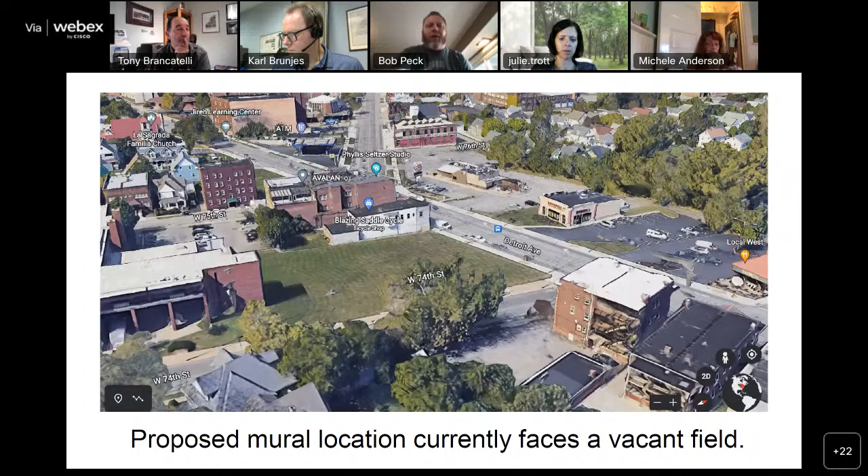I noticed they had a garage space that had a blank kind of gray wall on the side there that you can see located in this image. The wall itself faces a vacant field currently where the original Watterson-Lake School used to stand. And right now it's open to the side street as well as Detroit Avenue. So being an artist, I thought it would look good with a little bit of color on it and a nice mural. So if you go to the next slide, please.

This is a detail shot of the wall. It's 24 feet wide, 9 feet tall. As I mentioned, it's just sort of a blank gray wall right now. It does have a fence in front of it with about 3 to 4 feet of clearance between the fence and the wall. So there is space to get in there and create a mural. Next slide.

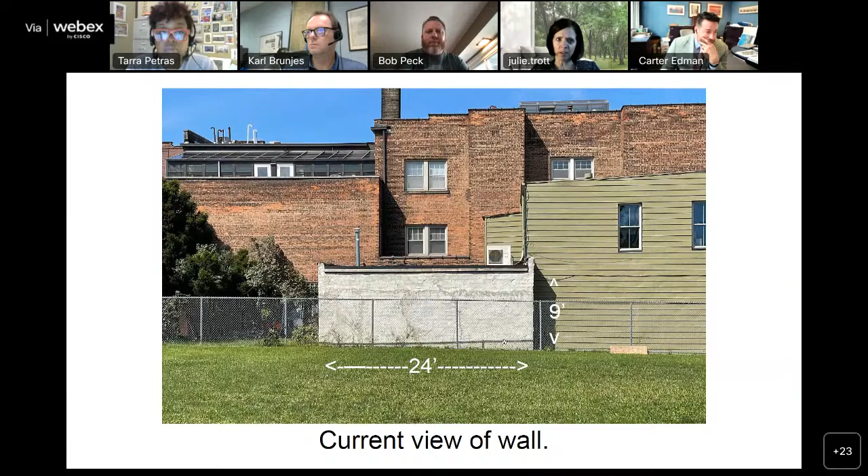Mr. Strickland. Thank you, Madam Chair. I'd just like to express that I'm also very much in support of this mural, and comment that oftentimes we like the mural perimeter to be withheld to expose some of the structure as a frame around the mural. But in this case, I agree with the comments from the Design Review Committee that it's most appropriate to cover the entire expanse of the wall. I think it looks great.

Thank you, Mr. Strickland. I'm also in support of the mural. I think this is a very interesting location.

I only have one question - is there redevelopment planned? If redevelopment happens on the adjacent property, what is the maintenance approach for this mural? You said there is 3 feet of clearance to allow maintenance of the mural moving forward?

Yes, I don't know where the property line officially begins for the lot itself after the fence. However, if the fence does belong to the Blazing Saddle property along that fence line, there should always be space to get in and maintain the mural as needed. I am aware that eventually that site could have large construction there. I just figured for the time being, whether it's a few months or hopefully even a few years, it'd be nice to brighten up that space with some art.

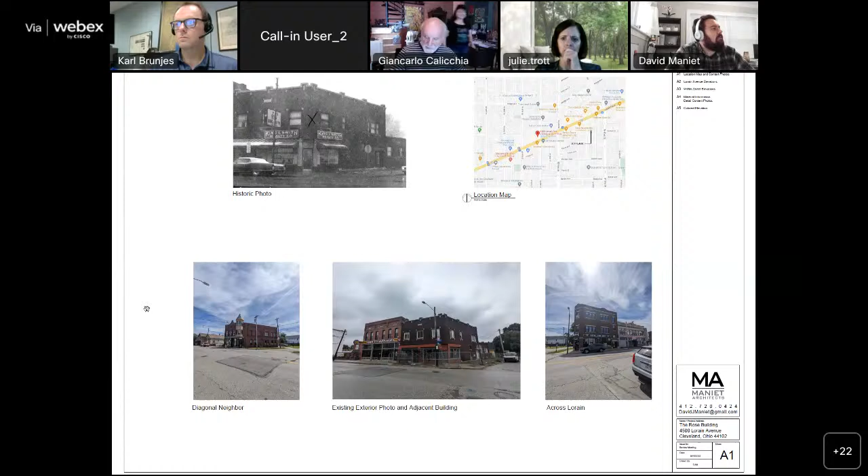Yeah, a couple other views of the building, one a little bit farther back. Thank you, Google Street View, for that, where it was a white version instead of the orangey reddish version of the storefront. We're looking to take it back a little bit farther to what would be a little more traditional.

So implementing full glazing, transom type windows above, and then restoring a brick detail base with some sandstone, matching the sandstone detail that is there existing. So what we see in the photo is how we want to restore the upper half, almost exactly.

Other than the windows, we have these white vinyl sliders, which also felt out of place. Normally we see a traditional double hung look, so we want to bring that back in pairs as it felt appropriate for the proportions.

And then taking some note from our discussion last week with the Ohio City Board. Across the street is the Arsenal Cider House. There's some nice detail there that was also pretty similar to our building. Some of the heights were a little bit different, but in the discussion, as a way to get some resolution on how the brick detailing could work.

On their side, they have a little bit of a higher sandstone base that matched that sill line. They kind of framed out and created a nice little bit of a detail that we wanted to recreate. We felt it would be appropriate based on what we're seeing above, where we have a couple of coursing details that block in.

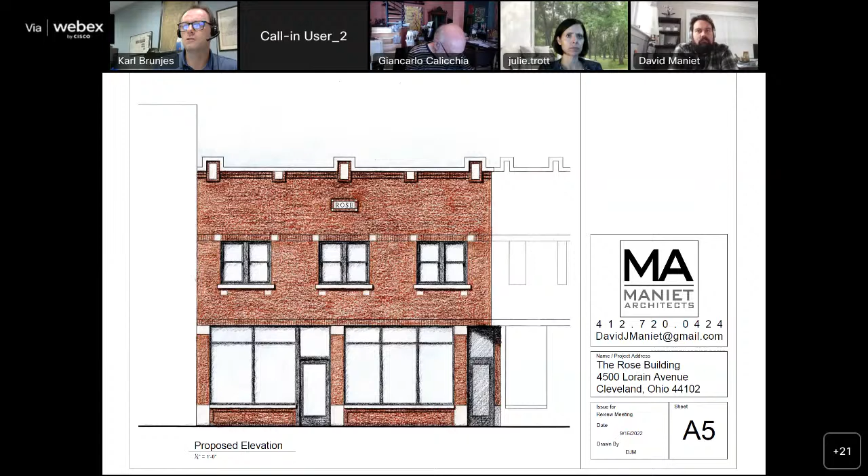Karl: Madam Chair, I do not see our representative, and they did not send over notes. I know this was approved, and they were thankful for the job being done, and it looks like they did make the changes requested. The windows were different when I remember it, and they did make the changes. So this does reflect what the design review committee had recommended. I just don't have those notes in front of me right now.

If I may comment, as Karl said, we did have full height windows and weren't looking at the transom. We had seen some other projects like that, so we implemented the transom - we actually liked that better. We also took that sandstone cap a little taller to the sill plate to help cap it. We'd seen a lower sandstone base detail, as you can see in this image to the right of the door and the corner, but taking it a little higher helped resolve that. Those are the two biggest things implemented on the drawing here.

All right, excellent, thank you for that overview. Appreciate that. We'll open up the floor for the commission for questions and comments.

Madam Chair, may I give a little background for those who haven't been here through this whole saga of this building. Yes. This wall has been bowing on the front since as early as December of 2017. The previous owners had been stating this was in a state of imminent collapse since 2019. This was reviewed by the Landmarks Commission in October of 2020, when it was tabled for more information. It came back on November 12, 2020, where the Landmarks Commission denied the certificate of appropriateness for demolition.

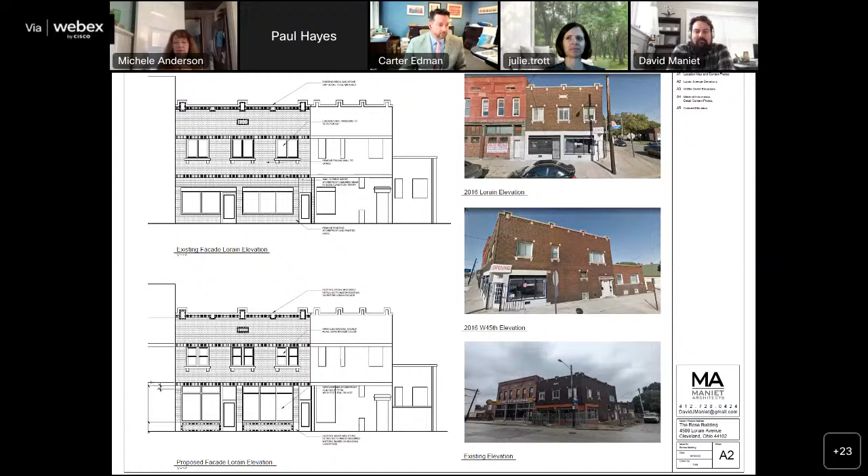Thank you, Ms. Anderson. Mr. Strickland? Thank you, Madam Chair. I appreciate the applicant's explanation of what they've gone through with Thomas Brick to try to find a match for the existing masonry that will have to be replaced.

I have a question about the mortar. Typically with a building this age, it would be an on-site mixed mortar with a slightly larger aggregate. And I wondered if any attempt is being made to try to at least match the color of the existing mortar, if not the actual texture of the existing mortar on the building.

Yeah, I think as we continue this process with the brick, obviously the cleaning portion is going to help us determine that color as well, which is why we don't have anything presented specifically right now for that. But I don't see any problem, at least with the color, to be able to get a match. Paul might have a better answer on texture in that part with his masonry work, but I think matching the color is something else we can accomplish here by getting a close color, even if there's a couple of processes, either with an acid wash or something like that, that can adjust to a degree.

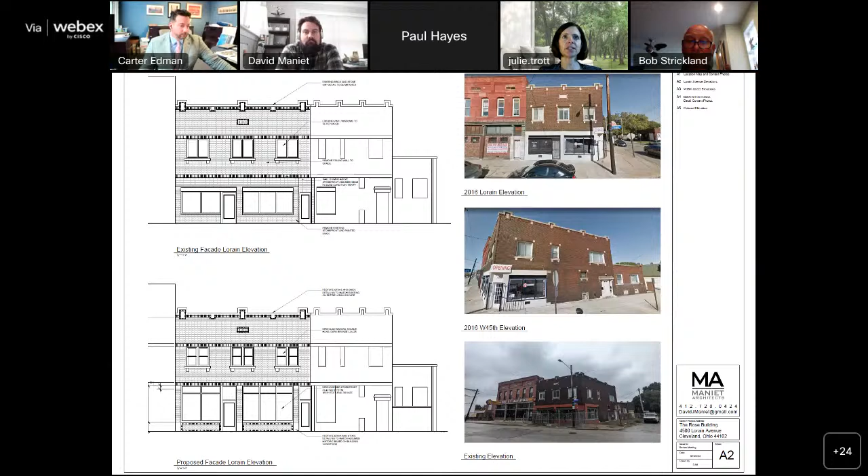Hearing a fairly consistent round of support for this project, would someone like to make a motion? Mr. Redmond? I would move that the project be approved as presented. Excellent, we have a motion by Mr. Redmond. Do we have a second? Second from Tony. Thank you. We have a second. Any further discussion? No? All right, Mr. Brunjes, please call roll and announce the results.

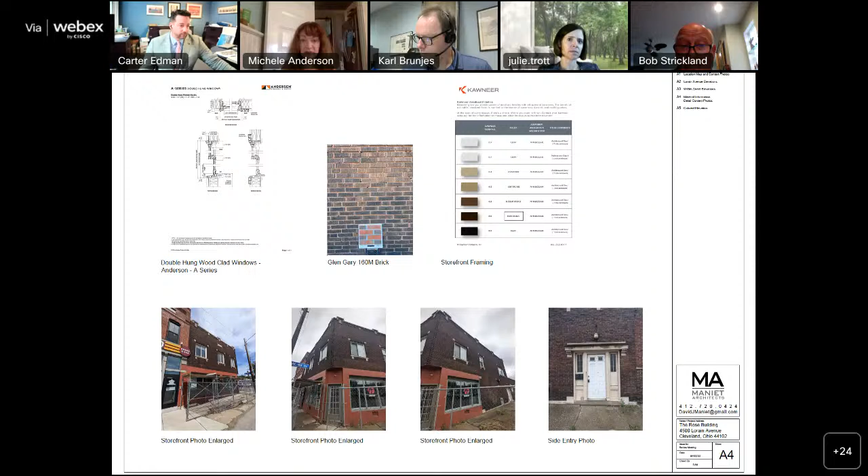Ms. Anderson, yes. Brancatelli, yes. Mr. Colicchio, yes. Mr. Dreyer, yes. Mr. Redmond, yes. Mr. Strickland, yes. Mr. Tarasuck, yes. Ms. Straub, yes. Madam Chair, the motion passes unanimously.

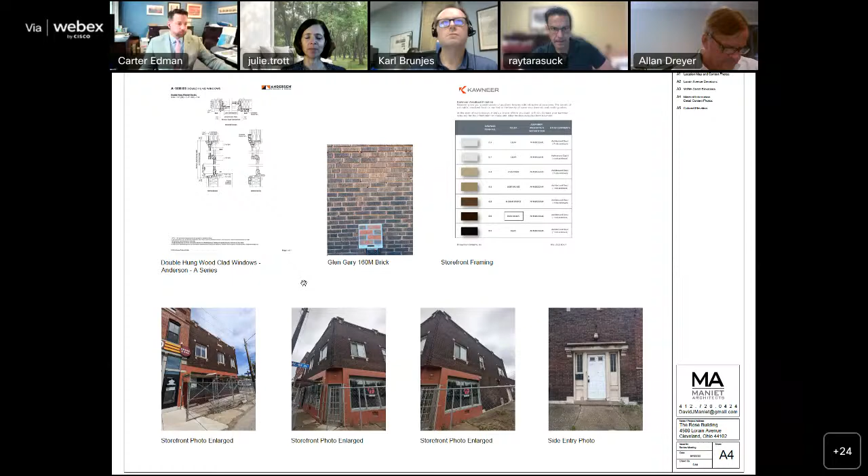Excellent, well thank you again for your persistence and for staying true to this building. We look forward to seeing this redeveloped. Of course, thank you very much everybody, I appreciate it. And as the weather turns, don't forget shuffleboard's a great fall and winter activity. Thank you very much. Thank you.

We'll now move on to our next applicant, located at 10828 Drexel Avenue, request for demolition.

All right, thank you all. Karl, would it be possible for me to share my screen? I actually updated our slides slightly. If not, that's okay. Actually, no, we would have needed that. Okay, sorry, that's no problem.

My name is Alex Abramowitz. I am the manager of the Demolition Bureau here in the Department of Building and Housing. With me is Brett Parsons, our Cleveland Foundation Fellow, who started in July of this year. We are here to put forward the proposed demolition of this property, 10828 Drexel, which, just as a correction, is in the Grantwood Allotments Historic District, contrary to what that slide just said.

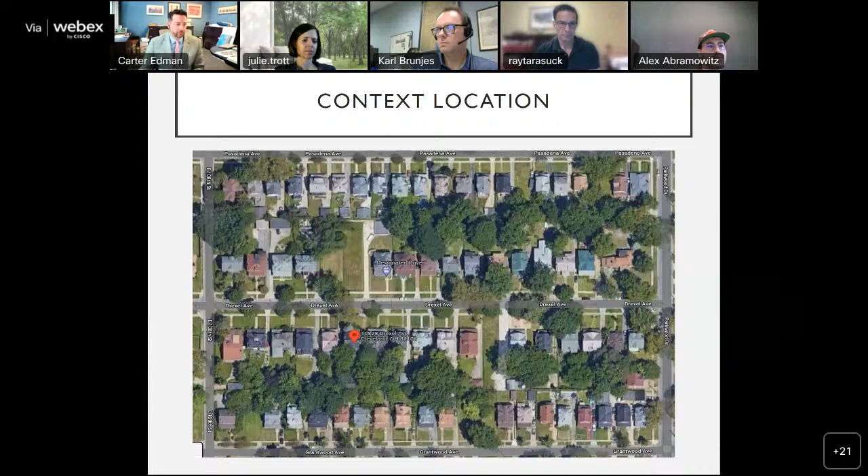So as you can see, this is on Drexel, just east of 105th. We are down the block from the recreation center there, you see that's in the old, I believe, synagogue once upon a time. And if you can advance the slide, Carl, this is, and one more too, really on a well-maintained block. To the east of this property is a home that's getting actively rehabbed. When we were out there on our site visit last week, the owner who lives down the block let us take a peek inside. Looks really good, it's progressing well, smell of very fresh lumber going in, and it's exciting to see a property not go down this path. A big difference there is that that house was well sealed up and didn't get into the state of disrepair that we've seen at this property. So if you want to keep going here, Carl.

This property has several unsealed openings and has for quite some time. Right here we're looking at the carriage house in the back, it's a pretty large structure. This is off kilter and leaning a bit. I don't think anybody wants to get particularly close to it, and it's sort of understood, including by the local design review committee last week, that this property could certainly go because of the structural condition that it's in. But that's way back at the back of the lot there.

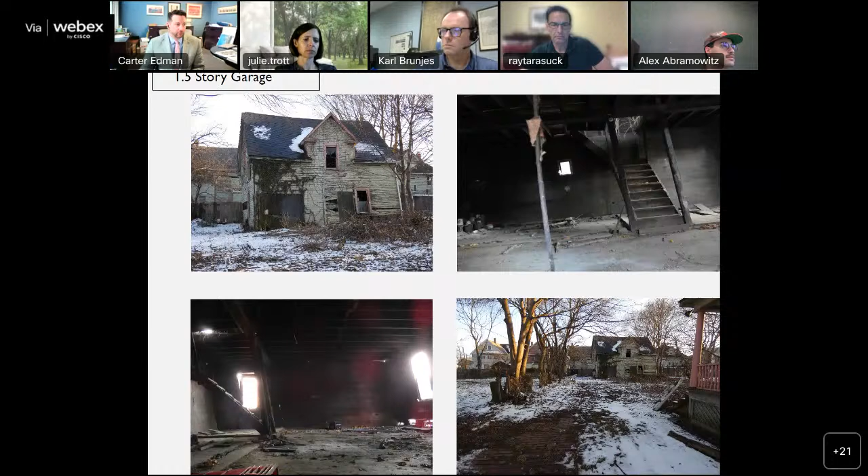The house itself, these photos are, I believe, from the beginning of this year. In general, you see what you see when a house has sat for years on end and hasn't been attended to. Lots of deterioration, and at a certain point, that deterioration leads to conditions that make rehab less tenable.

Inside of the house, I'm sure others that were on one of our site visits may be able to speak to this a bit more, but a lot of your significant interior architectural details are destroyed or in really tough condition. There wasn't much, at least that I encountered, that you would say, oh, that's perfect, let's just get that out of here and put it somewhere—that would be a real savings. The house is in rough shape.

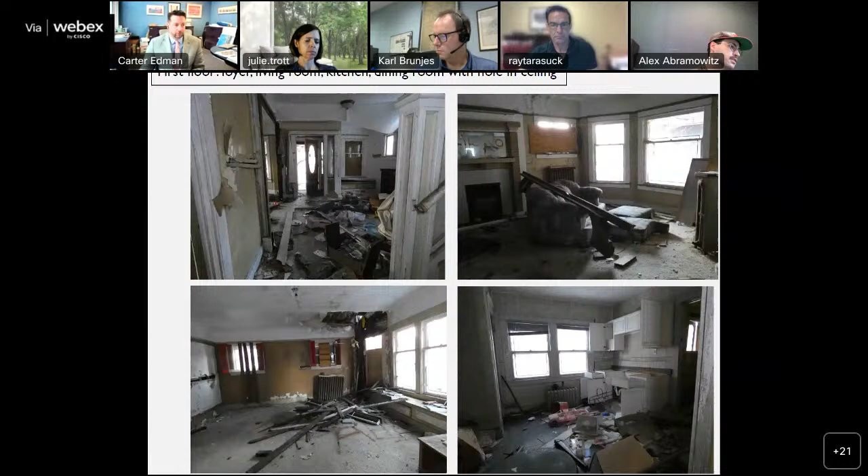Some more interior photos. You can keep going, Carl. Here's the second floor there on the right. There's that large hole leaving this open to the elements. That window to the left of it is also open. So as this has sat for years and years, I can't tell you when that hole appeared, but I can tell you that every day it's open, this gets less workable. And that's just kind of the reality of it.

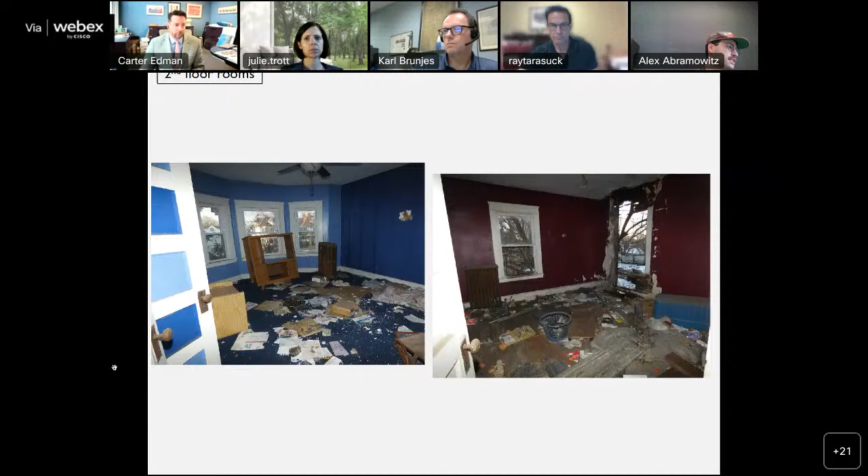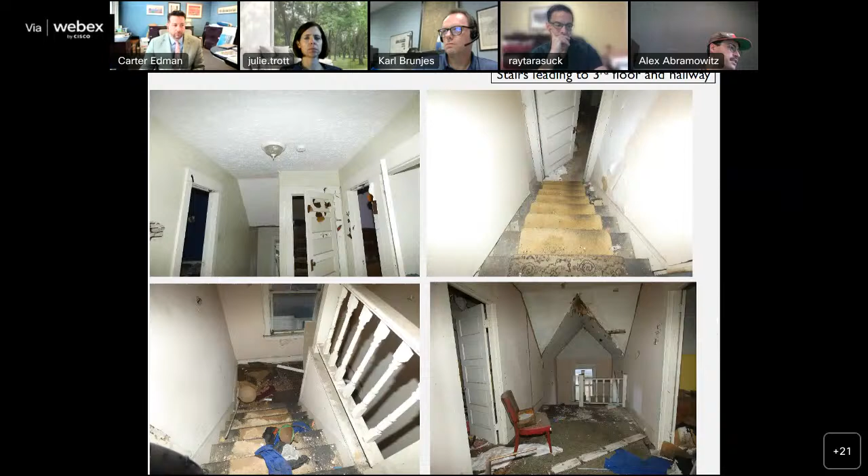Some more, you can advance to the next slide. You can just flip through these. That attic there on the bottom right, it's not well captured in that photo, but the ceiling there we saw some light coming through last week, and in general you've got some water leaking in up into the attic from that area as well, separate from that two-story hole in the side of the building envelope.

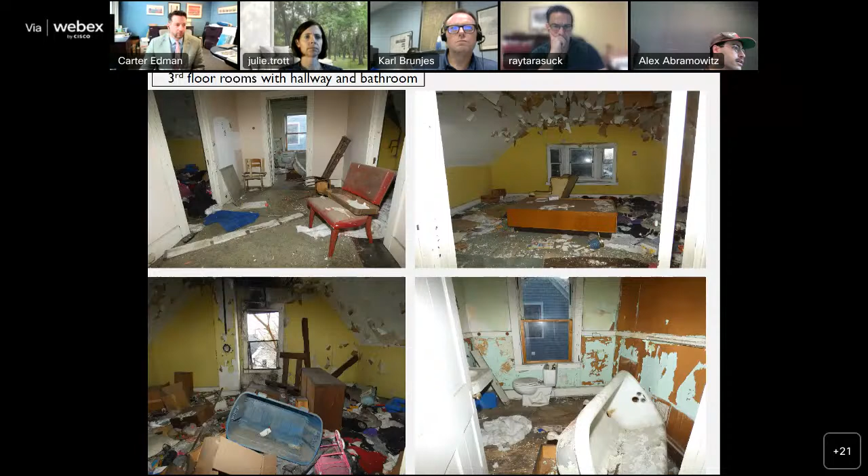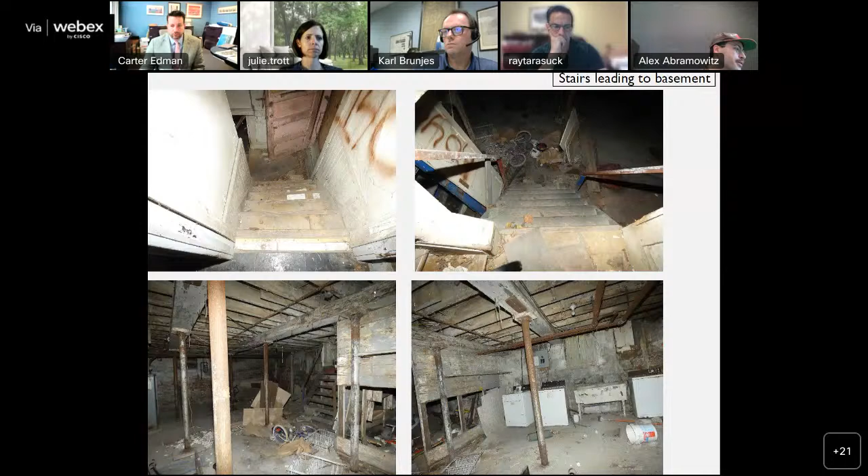The basement, it's a basement, somewhat, perhaps the least notable or remarkable compared to the rest of the house.

Asbestos survey—our abatement contractor will have their work cut out for them a good bit. Quite a bit of asbestos containing pipe wrap in this property, but that would get dealt with by a licensed contractor.

So a little more about these adjacent properties. Just to the west, and we spoke with some neighbors on our last site visit here, the Cloud family, who are grandparents. Their house is directly adjacent to this one to the west, and their property, like really every other property on this block, is really well maintained. The grass is cut, paint is fresh. There's a trampoline in the back. They have grandkids that visit from time to time, and this property is right there. And they've said that they would like to see this gone, and that they have lived adjacent to it for long enough.

On the other side, we have Paul Robinson, who owns 10832 Drexel. He lives down the block a little further to the west and is pretty obviously familiar with this neighborhood. That was the house that we went and took a little tour inside of. He basically said that this house, the one in front of you today, 10828 Drexel, is in much worse shape than what he's working on. And he too would like to see it come down.

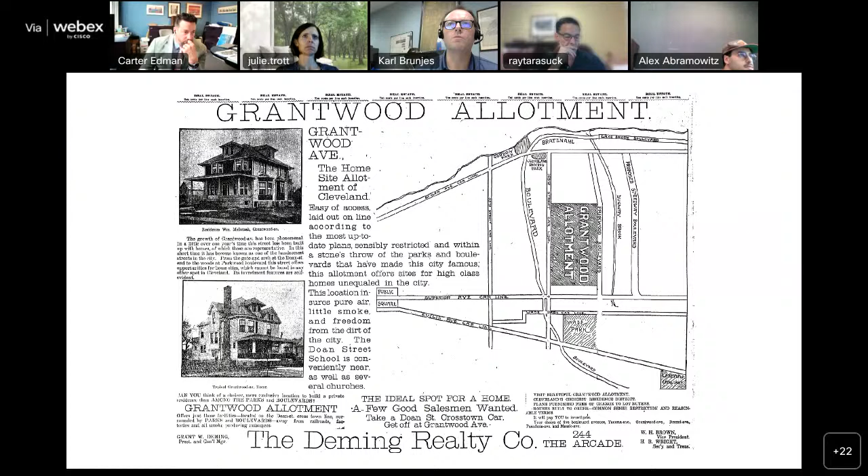The house was actually built in 1908 for owner Christian Hanger, who was the owner and founder of the CF Hanger Carriage and Wagon Company in 1892, and would later become the CF Hanger Company. He had some patents dealing with dump trucks, and like I said, the architect was the Deming Realty Company. There's a handful of these done by that company in this area.

In 1922, the property was sold to Charles Henry Phillips, who served as a bishop. Charles Henry Phillips was born into slavery on January 17th, 1858. He is noted for founding and serving the California, New Mexico, Arizona Colored Methodist Episcopal Conference from 1902 to 1940. He organized many CME districts and churches, sometimes called Phillips Chapels. Between 1910 and 1932, his efforts helped raise the number of CME members in Ohio from 250 to 2,100.

He was first schooled at home, but then later attended Atlanta University in Georgia, and in 1878 he was licensed to preach. He received a BA, MA, and degree of medicine from Central Tennessee College in Nashville. So he is an influential member of African American history. He also is the author of the history of the Colored Methodist Episcopal Church in America, as seen by this page here. This is the third edition, the first edition was in 1898.

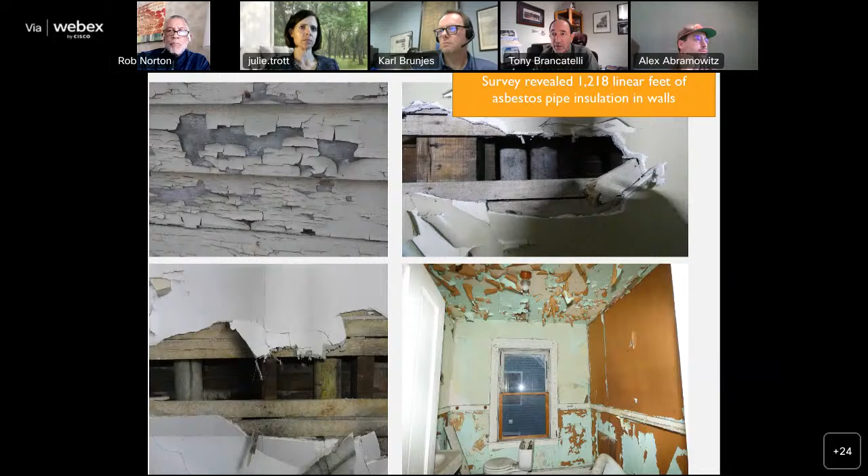Thank you, Madam Chairman. The site visit was pretty illuminating in looking at how bad the property has gotten. I think more so than just deterioration now from those photos presented by Alex, to the condition we saw even when we walked through last time. The property has been breached numerous times and elements of any historic character have been removed. There's been a significant amount of additional damage, so this property continues to be a blight in the area, and it seems like it gets breached often.

It also creates a danger and is dragging down the values of the neighboring properties. The neighbors, when we were there, really raised concerns about that property continuing to stand in the condition it's in. It only continues to deteriorate, and that back area is open to the elements and collapsing, also a danger for further collapse as the weather continues to change. It was pretty unfortunate to see the condition it got to and how fast it's deteriorating, with that back building leaning further left than any political candidate.

I think it was a good site visit to see how far it's gone, so it raises a lot of concerns about leaving that property up. I appreciate that site visit getting done.

I had a quick question for Alex: he noted this is a state forfeiture property now. I don't think it's deeded to the state, so the ownership is still the previous owner. Has been my general understanding on state forfeiture, they only have the title interest, which is why they put their name on it. That's my understanding as well. Okay, all right, thanks. Thank you, Madam Chairwoman.

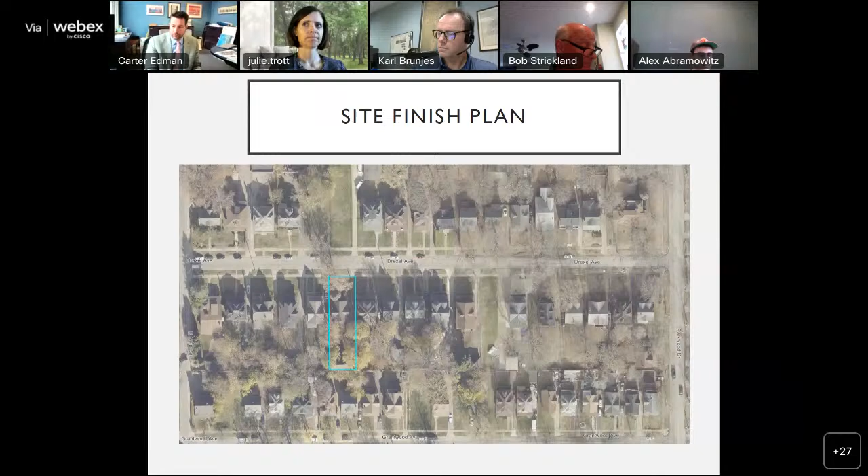Well, regrettably, we do see this moving forward, but I will hope, Alex, that we can all work together to find a new avenue for future cases like this and start identifying these before they get to this condition. I look forward to it. I'll be reporting up to my director, and hopefully we can find a good path forward.

Excellent, thank you. Madam Chair, on that point, I would welcome to participate in that discussion. There's an incredible amount of tools that the city has as a municipality for receivership, for doing improvements, doing interim measures. There's board of revision sales, I think, to Mr. Strickland's point, on properties that are tax delinquent. So there's a great amount of tools out there. We just need to marshal them and identify how we can use those in advance of them getting to this state. So thank you.

Excellent. Well, Mr. Brancatelli, if you could maybe jot those down for us collectively, then we can work together to start seeing how we can use those tools. And sorry to say this, but please send them to Karl so that we have them in a consolidated point. Karl's shoulders have just gotten a lot bigger in the last month.

All right, continuing us forward, we'll move on to our next applicant, the Equinox, located at 1424 West 48th Street. Revisions to townhome project. Karl, do you want to give us a little history on this prior?

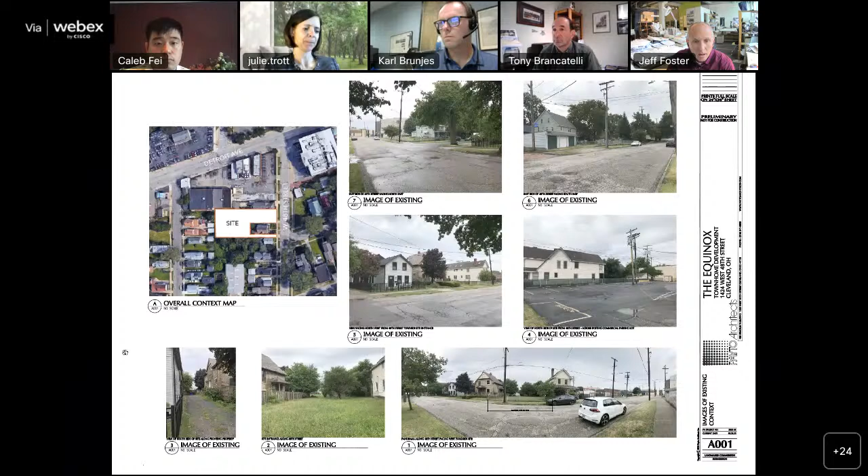I'll run you through some of the basic changes we had. One had to do with materials, and we'll get to those when we get to the exteriors. But from a site planning perspective, the buildings are named 1 through 5. Between building 3 and 4, there's a pocket where the units come together, and there were some navigation issues with turning in and out of that.

So we've made a couple of adjustments, in particular with building A, which is the single family unit along 48th. We were able to shrink the depth of that to give us more working room so we had a turning radius coming in and out of unit D1 and B3. As we developed the units further, we were able to get the full 20 feet that the fire department was looking for.

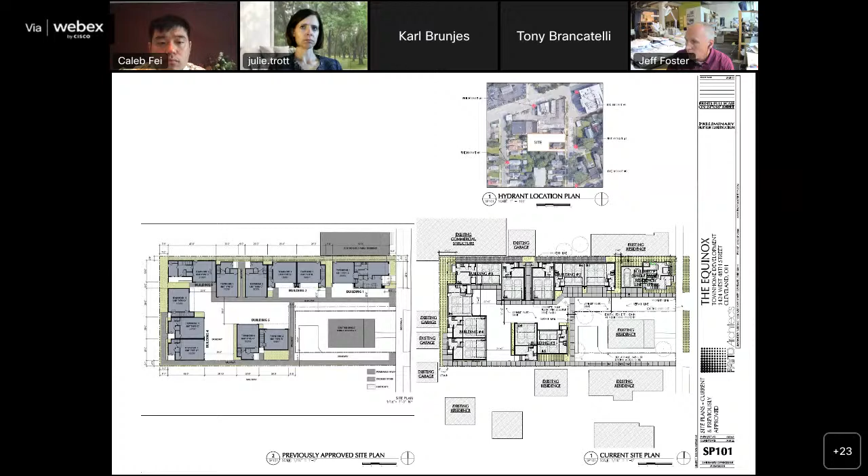They were looking for a lane extending all the way through the site that gave them a minimum of 20 feet. But you can see from an urban planning standpoint, the organic feel is still there, knowing this neighborhood is a tapestry of different forms and shapes. We wanted to completely avoid that repetitive cookie cutter feel from townhouse projects, and wanted to maintain that organic, natural feel.

The landscape plan is somewhat verbatim. We made a couple of adjustments with the locations of some of the beds, but the planting material is still the same. The lighting approach is also the same, just small wall packs over garage doors and downlights over entrances, so that's consistent with what it was prior.

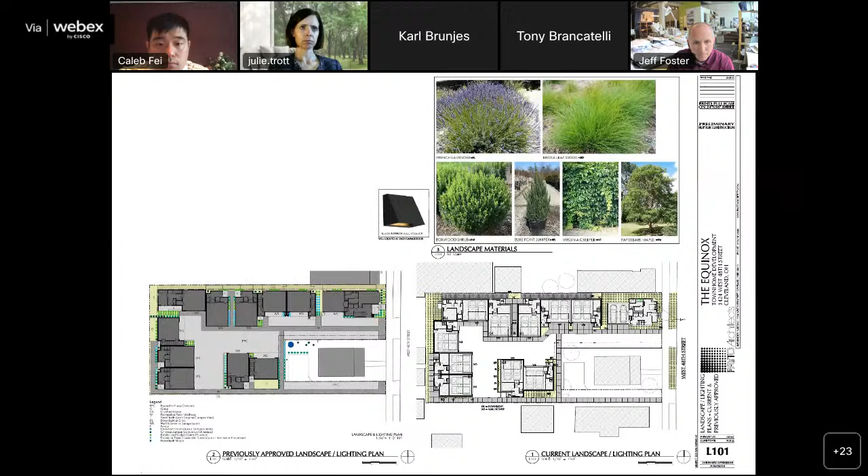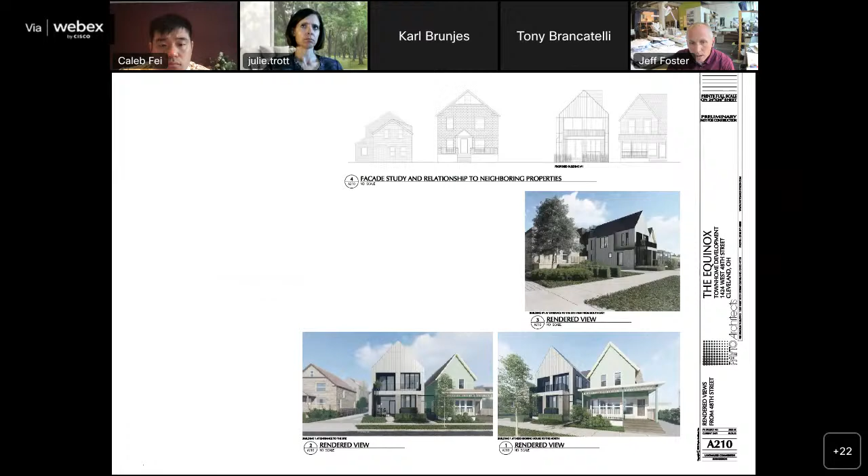Unit A, the single family unit along 48th, does not change. Architecturally, it's important that it fits in with the 2-story single family scale of the neighboring properties. The diagram at the top of the page shows how that fits in beautifully with the scale of the houses to the left, north and south of it. These views are the same as what they were prior.

These show you the before and after, and this is where we get into some material changes. The prior approval had wood siding at the base of all the units, and as we looked at that from a constructability and wearability standpoint, with these being condominiums, that's a maintenance issue over time, so we've changed that to a brick base on all the units. We think that will wear better in the short and long term and provide a better product over time.

As you look at the elevations and renders, there was some liberty taken in the former design with window placement and window sizes that didn't really match up to the plan. So we've updated that, and what you see in the current rendered views and elevations match the plans. So befores and afters, we made the changes.

Once you get above the first floor into the second floor of these units, we did maintain a wood look, but instead of actual wood, it's a wood grain metal so we can keep the warmth of that material, since it does a nice job breaking up the facades and giving it some warmth. That was important to us. The balance of the materials on these is the same, a painted fiber cement siding.

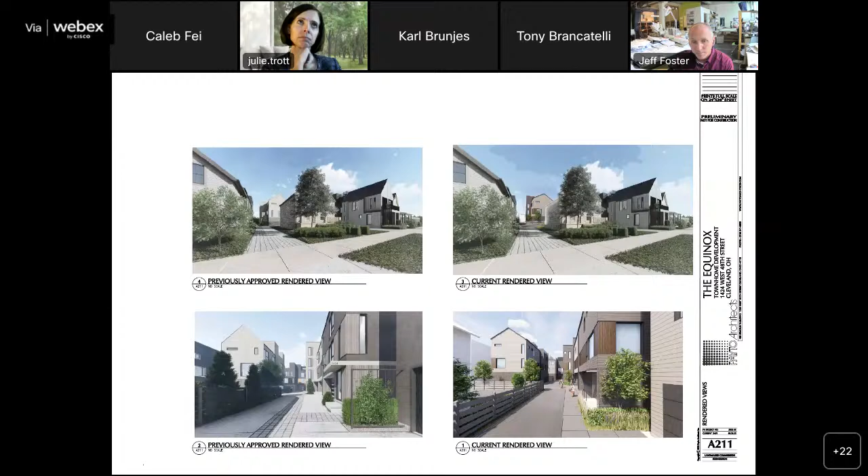Some views from the interior to the site.

From a constructability standpoint, I'll point out on the top two renders, these do have rooftop decks. We had some constructability issues with what was presented prior, with somewhat of an open gable on the sides, and we've simplified that while still maintaining the gable form, which is important to view from 48th, but also from the ground.

Comparing the window placement on the two elevations, you can see that the placement is slightly different, lining up with interior functions like bathrooms and closets. We didn't want to show something that either wasn't constructible or wasn't something that was actually going to happen.

Aesthetically, it's the same organic feel with the mix of light and dark siding, so each unit has a very distinct identity and reads as an individual unit. The landscaping throughout softens all of the edges and creates a nice soft feel as you walk through the space. Next slide.

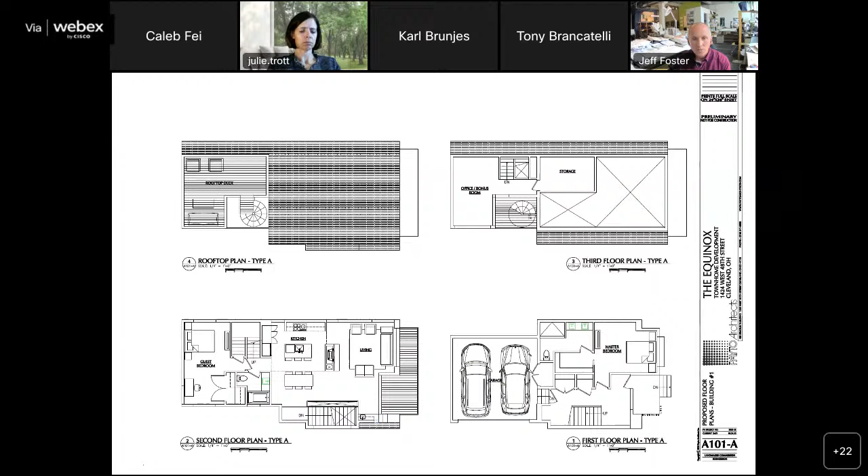Next, these series of slides are the unit sizes, ranging from 1,500 to 2,000 square feet, which is very consistent with what was presented prior. The balance of these slides move into the exterior elevations. So Karl, if you just want to flip through those.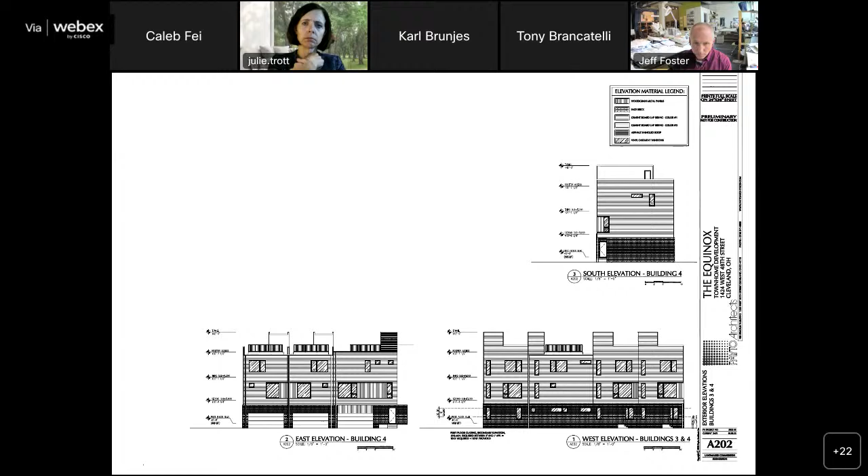So I believe that's a summary of the changes, and I will turn it back to the chair. Thank you.

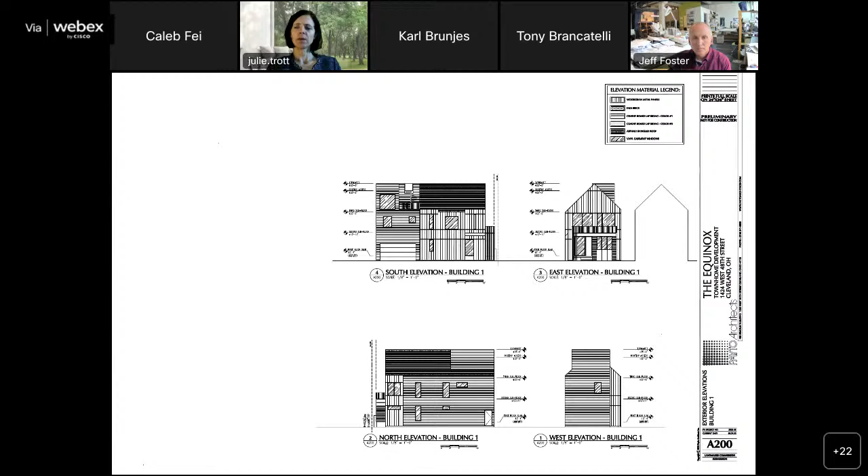Karl, did this go back to local design review? Remind me. It did not—the new plan that was received was abandoned, so they went back to the original plan and made the modifications to this original plan.

Perfect. I'll add that I'm still waiting for the final townhouse review on it, and I'm hoping that'll be done. I believe this still has to go to the planning commission for conditional use for the townhouses in this district. Perfect, thank you.

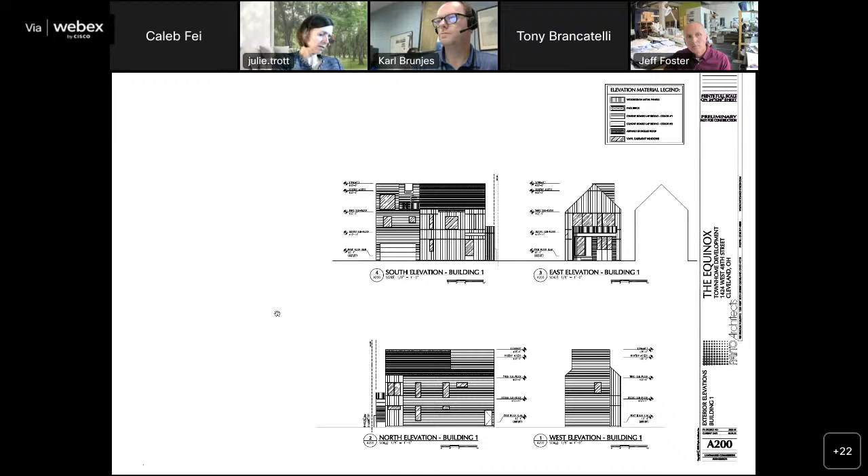Yeah, this looks fairly consistent. It's obviously a modification from what we approved previously, but I do not see anything I object to based on the revisions. I think your site work is more realistic and logical, and the renderings show a bit more landscaping or appreciation of landscaping than you previously had. I appreciate the materiality updates for durability. So I'm in support of the new proposal.

Ms. Anderson: Thank you, Madam Chair. I was not in support of the previous proposal, and I am not in support of this one. The proposal does not provide, I think, residents enough individual green space. I don't think there's a place to set out your dog or put up a grill. I know the area well, and the district has yards and some individual green area. I think this proposal is inconsistent with that, so I am not in support.

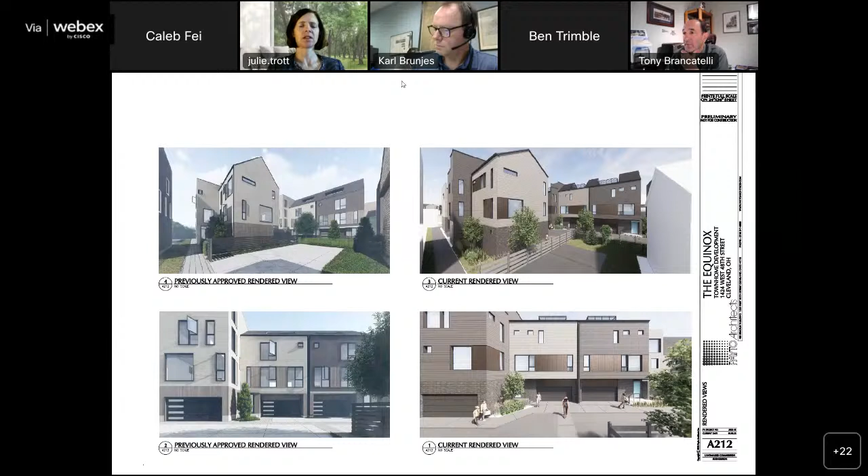Thank you for that feedback. Thanks, Ben. Of course. Other questions and comments from the commission? Mr. Edman, I saw your hand up, but I see it down now. Do you have feedback? Thank you, Madam Chair.

Just a quick comment. I wasn't here when the previous iteration was approved, but it seems like this iteration is merely an improvement on that, generally speaking. So I would find it hard to disapprove at this point. Thank you.

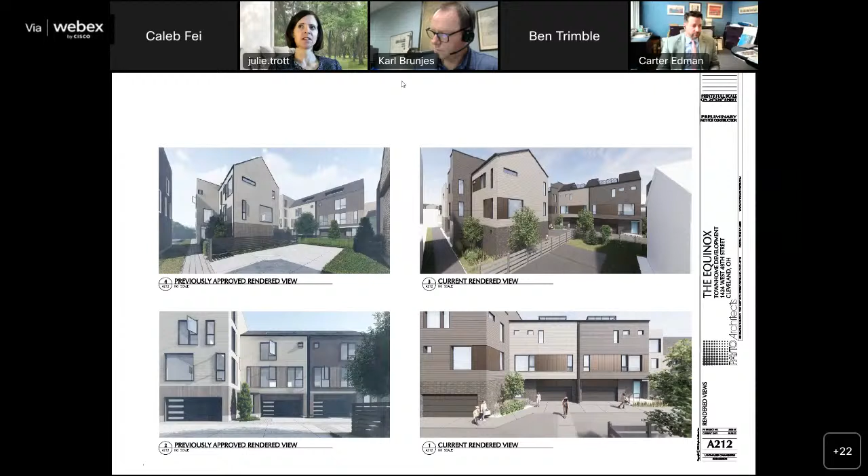Not seeing any further questions and comments from the commission, would someone like to put forward a motion? Mr. Edman? I'll move for approval. Thank you. As presented? Yes. Thank you for that motion to approve as presented. Mr. Strickland? I'll second that motion. Thank you. We have a second. Any further discussion?

No? Mr. Brunjes, please call roll and announce the results. Ms. Anderson? No. Mr. Brancatelli? Yes. Mr. Colicchio? Abstain. Mr. Dryer? Mr. Edman? Yes. Mr. Strickland? Yes. Mr. Tarasic? Yes. Ms. Trapp? Yes. Madam Chair, the motion passes 6-1 with one abstention.

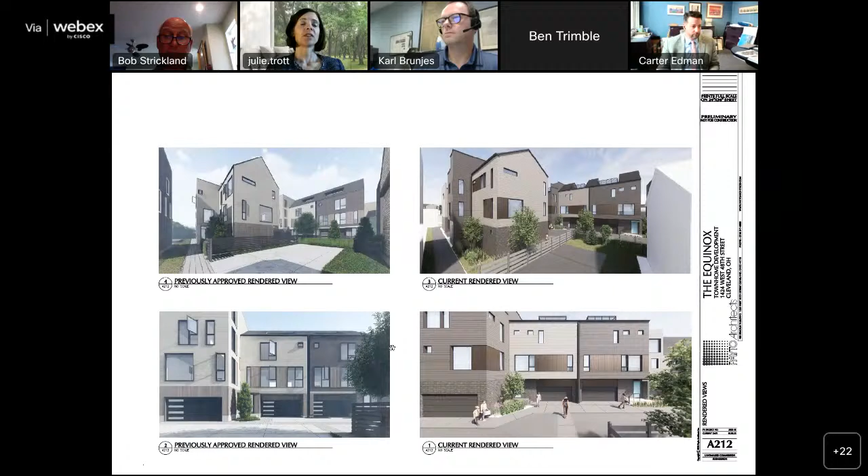Well, congratulations and good luck with your project. Look forward to seeing it. Thank you for your time. Appreciate it. Thank you.

We'll now move on to our next applicant, located at 1865-69 West 22nd Street, the renovation and addition.

Good morning, everybody. This is Paul Beegan from Beegan Architectural Design. We also have the owner's representative, Mr. Brian Spear, on as well. You may recall this project we had presented to you previously and had some comments from both local design review and from this commission. This is a representation of a modified scheme based on those comments.

So a quick refresher here. This is just an overall location plan so you know where this project is at. It's behind the West Side Market on top of the hill, going to be the bookend of the renovation of Irishtown Bend. It's the parcel pushed right up next to West 22nd. If you've ever driven down behind there, it's the end—there's a little cul-de-sac, and this is the only building across from the church there. We can go on to the next slide, Karl.

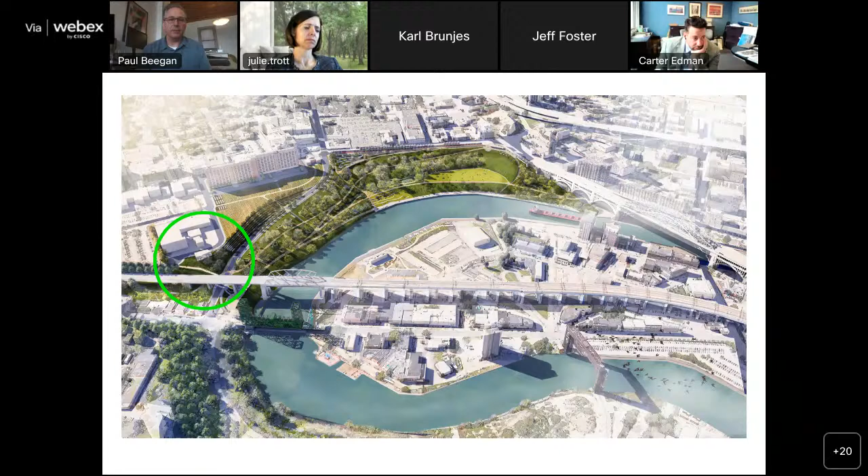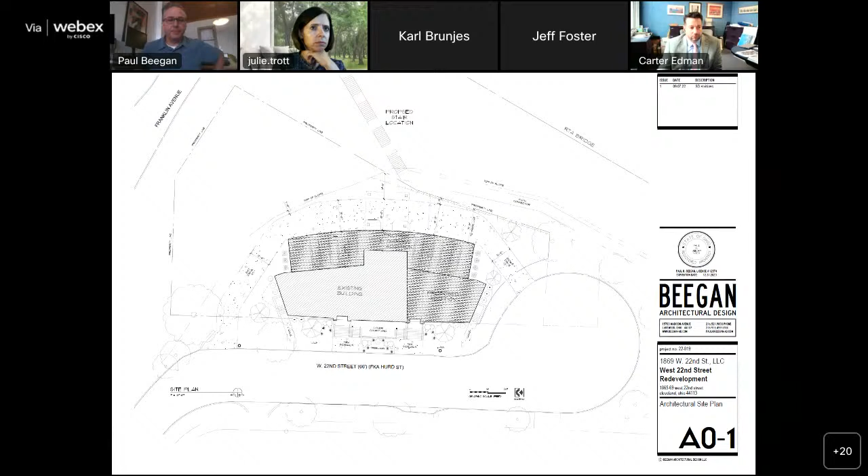These are—I have 2 pages of elevations just so that you can see what we're planning to do.

Overall, the scheme for the development is to take those two buildings, recreate the entrance between them, and then mirror that entrance over to serve the separation between that and the new addition to these buildings as well.

Comments previously noted the rooftop addition was the majority of our redesign, so we worked to bring that back into something more acceptable to board members. It was more of a separate structure before; now it's more integral, following comments from local design review and this board to make that rooftop structure more integral into the design.

On the ground floor level, we plan to do a sunken courtyard and recreate some new entry steps into the building on the outside.

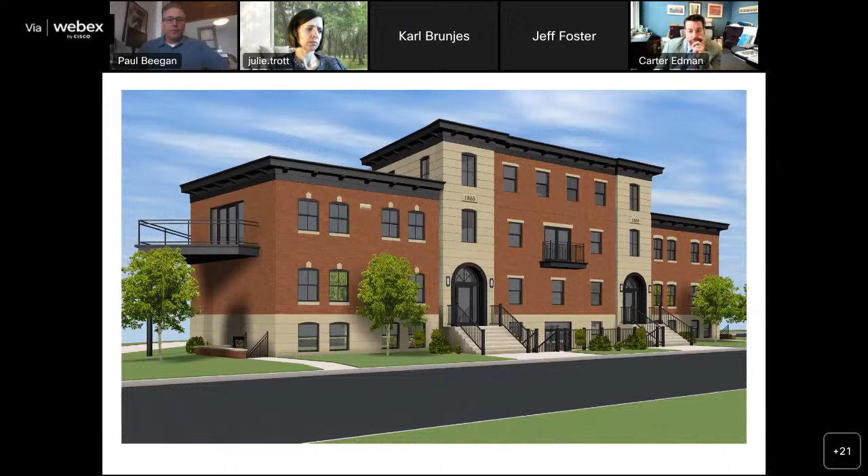The entrance pieces will be in cast stone that continues up. We're going to add onto the parapet of this building, as well as the new addition, to move it up a little higher and add the decorative cornice to it.

All the windows are going to be replaced. We were just reviewing those last week — they'll be aluminum clad wood windows to replace the white vinyl windows that are there now.

We know we need to come back before you once we have our final material selections made, including the new brick for the addition, our cast stone pieces, window samples, and final landscaping. But we wanted to present now so we can move forward with our next steps in the design process.

There's two more renderings to show the different views and perspectives — this one is from across the street, as if coming out of the church on West 22nd.

This is what you would see at a more eye level perspective, so you can see some of the detail with the courtyard and the entrance.

Thank you for the presentation, that is very helpful. We will begin with feedback from the local design review committee.

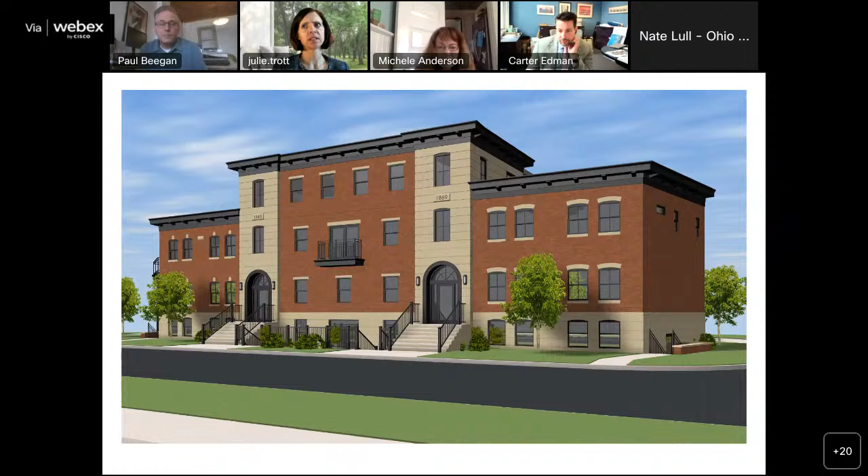Mr. Edman? So this is a question for Ms. Anderson. If they replace the cast stone with the brick, which I think is an interesting idea, do you think it should be a matching brick or a contrasting brick?

I think it could be a contrasting brick that could give it some interest. Or maybe just a subtle contrast or something. I don't know. Yeah, I think that's an interesting idea. I like it. Thank you.

Ms. Trott, would you mind me asking a clarifying question as well, too, along those lines? On the cast stone, again, I just want to understand, natural stone would be okay, but if not, cast stone is not okay.

And again, just in my experience, we use cast stone for replacement because we do a lot of historic renovations. We use cast stone as replacement for natural stone because we can modify it to look really close to as close to real stone as we need to. There's all kinds of different ways and treatments that we could do cast stone. It's not like, hey, it's going to be just concrete panels thrown up there. So I guess I want to understand the reason why a natural stone would be okay, but cast stone is not. And in the comment, thank you.

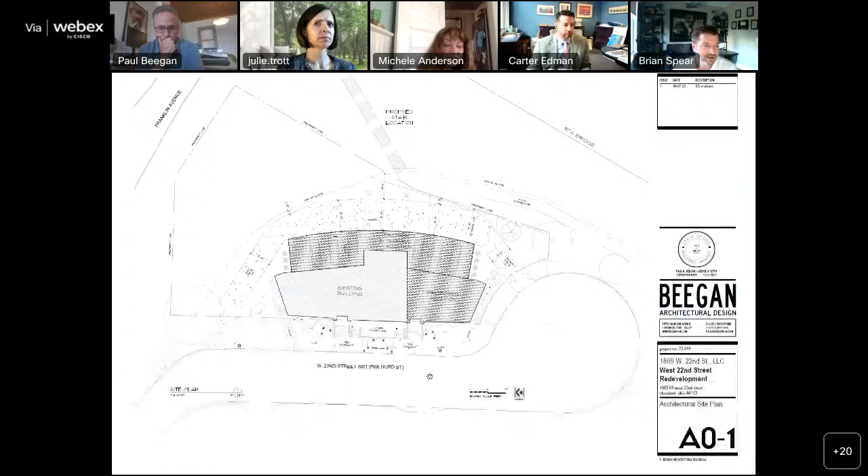We met a couple months ago and appreciated the comments that were there. We did our best to incorporate those comments. They were mostly related to the brackets and the roof structure. I think there was some follow-up related to the rear garage and wanting to see that, which we've provided here, and also with a modern interpretation of the historical structure on the new building on the south.

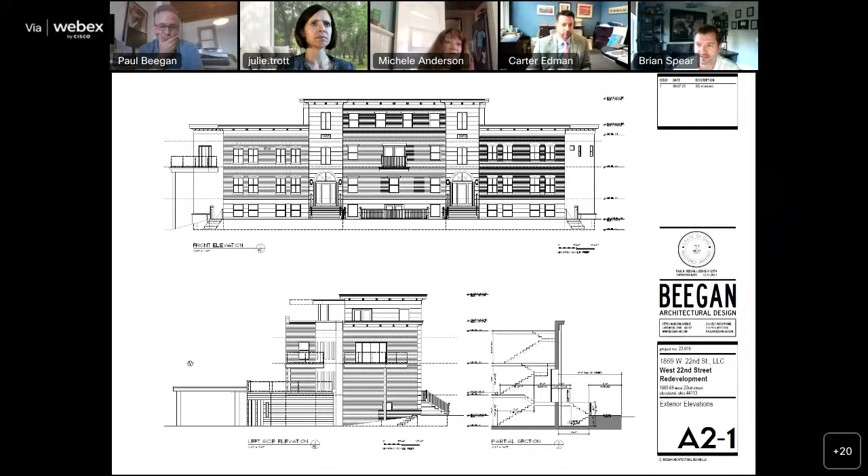As we went back and redesigned this, given the construction costs that are here right now and some of the other things, this is an expensive proposal that from just an investment perspective doesn't make a whole lot of sense.

The request that I would have based on Ms. Anderson's comments would be that when we move to natural stone versus cast stone, it makes something that is already very expensive and doesn't make a whole lot of sense from a financial perspective even more expensive, and it exacerbates the problem. So the request would be that we would consider the cast stone or one of these other alternatives to give the building this aesthetic. Thank you.

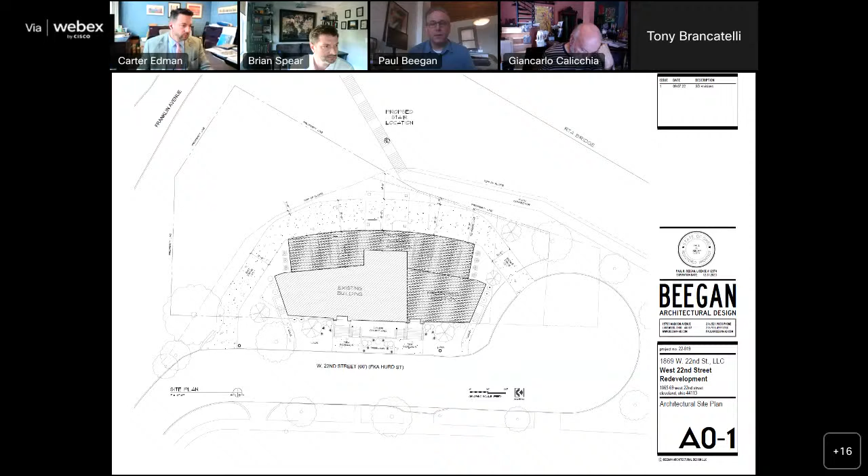Yeah, we kind of got into the same conversations about some of the detailing, right? Overall positive. You heard the comments about the Juliet balcony that we talked about before, and carriage doors were talked about. So it was kind of more in the detailing of some of the pieces rather than the overall direction of the project.

So what I'm hearing right now is I think the commission is in support of this project and the general direction that you're going—I think we expressed that the last time you presented. But this is for final, so those final details are required to be understood for the final approval. I personally feel like we may want to table you so that you can work through these details and bring everything back to us for final approval.

I think the general direction is we support it, and I hope you've heard that as a commission. But we do need to finalize what your materials will be on the back—the landscape, the lighting, the materials, the exact samples—so that we have them as part of our records of your colors and final materials. There are things we've asked you to consider, like the brick versus the stone at the entrances, and the Juliet balconies and windows on the 3rd and 4th floor. I would agree those are considerations.

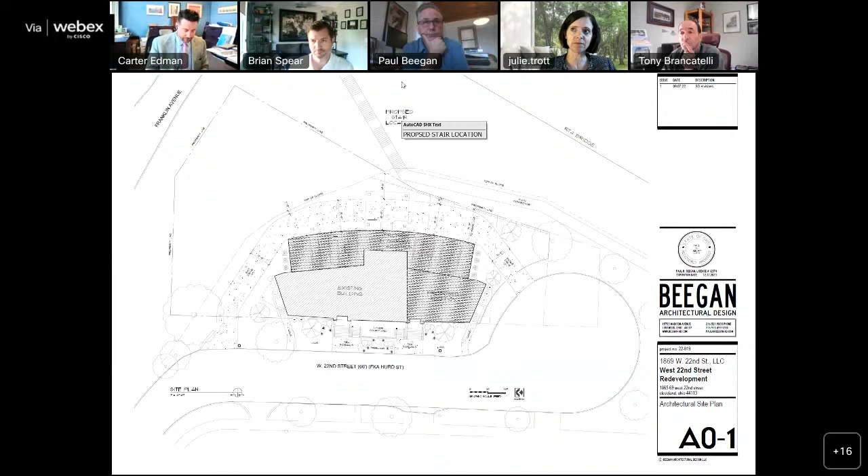But for final approval, we do need to focus on those final items like your materials and so forth. So that's just my personal opinion of how we should continue to move this forward. But I would love other feedback from other commission members.

Madam Chair, if I could also add, what would that rear elevation look like in a more detailed rendering of color and material, because that may come into play significantly as we continue to see the amazing investments happening along the riverside. And if they're going to continue to pursue either the natural stone or cast stone water table, we absolutely need to know how that will be applied to the existing masonry.

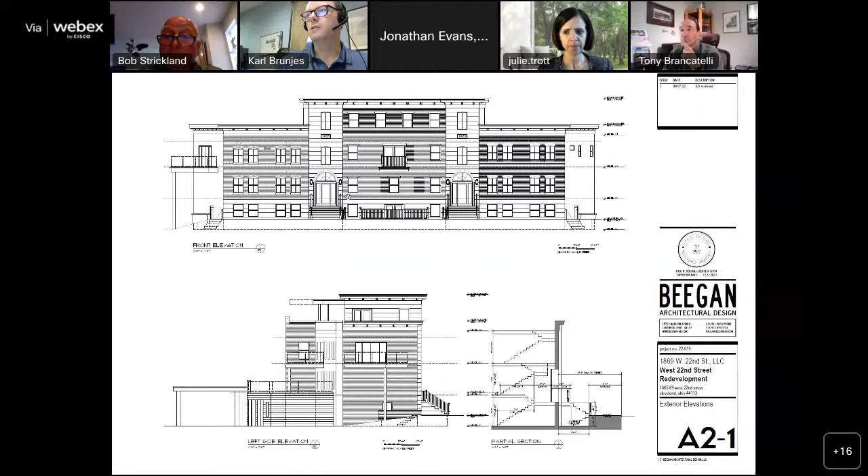Does the owner, we need your approval to table this, because like we said, we are in support of this. We just need to finalize those things, so that we can give you a final vote versus make you come back for a fourth time to staff and then back here.

Yeah, let me ask. So again, here's what's likely to happen. There's not been a consensus of approach to say, oh no, you can't use the stone at all. Can you consider brick? We're not a super fan of the Juliet Balcony, but that's just our opinion. Hey, you might want to think about the cornice piece a little bit different.

So if we came back to you with this exact same design, said, hey, here's how we're doing the Juliet Balcony, here's how we're doing the stone, again we have a lot of feedback, yes, but not enough consensus for us to say we need to change this and this and this to get approval. Do you understand what I'm saying? I agree. Yeah, sorry.

So again, if we need to table, we would do so. We don't want to necessarily go against the desires of the committee, but we want to be able to move this forward with a certainty. Sure. Understand what I'm saying?

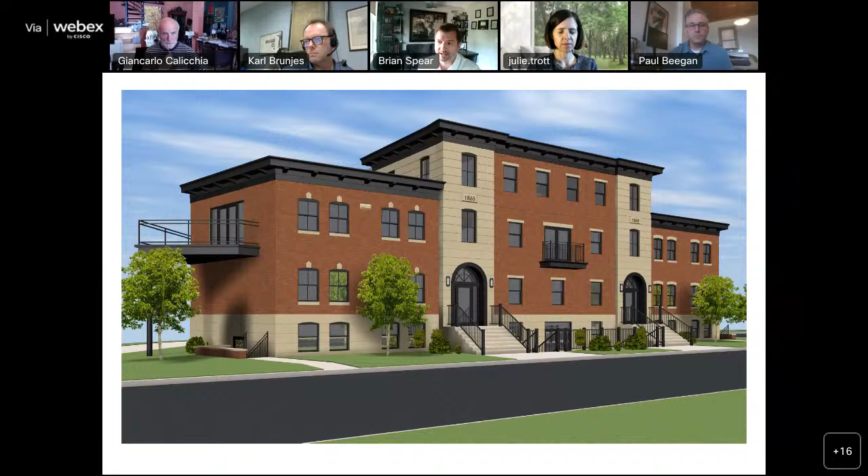This is Brian Spear. When we met in mid-July, we took the comments from this committee and from OCI very seriously, and we worked for the past 2 months to integrate those designs. We have a very different design now. The comments we received in mid-July never included any comments about the Juliet Balcony, and that's why, when we're saying we want something actionable for us to take next time through, we're hoping it can be efficient and finalized rather than us trying to integrate changes and then being told to include something else. We're just trying to understand what is a consideration and what is a condition, so we can take action on it.

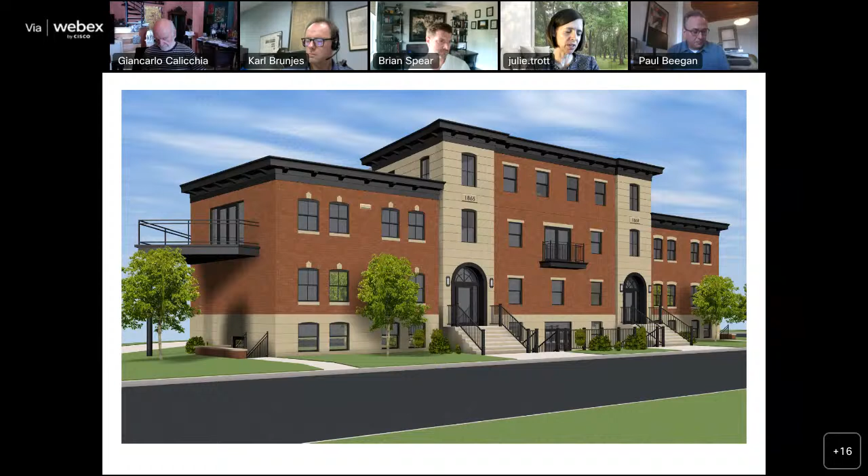I can articulate what I have written down so that if we went to a vote, we could be clear. The conditions are that you need to submit your final materials with materials articulated, manufacturers and colors, the final landscaping plan with materials, the final lighting plan with fixtures, a final rear elevation with materials articulated and committed to. A color elevation would be a recommendation.

The considerations are considering the materiality of the two entrance towers or entrance feature pieces, to determine if they're going to be natural stone, cast stone, or brick. Consideration of the Juliet balconies and removing them, and if that does happen, my recommendation is that the 4th floor has 3 windows to be consistent with the 2nd and 3rd floor. But those are recommendations and considerations.

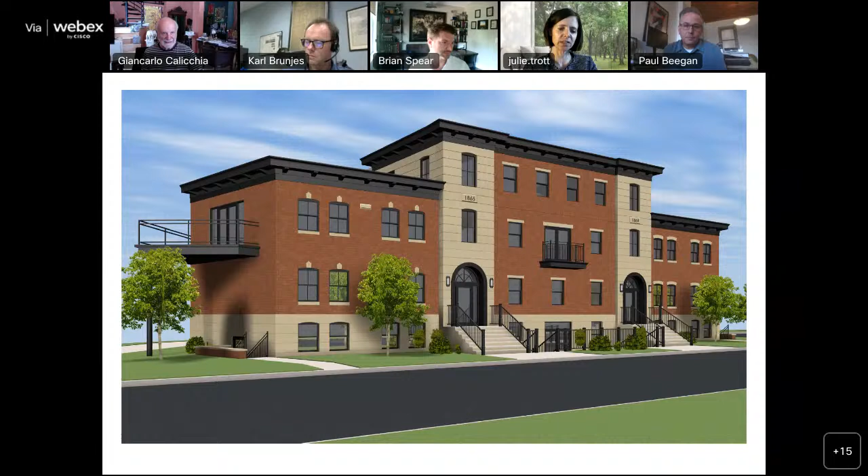Those aren't deal breakers. And then the last one was changing the detailing of the north balcony from the modern detailing to match the detailing on the rest of that elevation and your west elevation. Is that clear enough? Madam Chair, I would add that the detailing of how the water table would be accomplished, if they're going to apply either cast stone or natural stone material, has to be detailed.

Thank you for that addition. Appreciate that, Ms. Trott. Thank you. You're welcome. Madam Chair, this is Bob Strickland.

I've been on the commission for 8 years. Never have we considered so many conditions for a project and granted final approval. So I think that list of conditions is so long that it warrants consideration of tabling this project, giving the applicant time to address those. From my standpoint, the lack of details and definition of materiality is my biggest hangup. Whether they want to maintain the Juliet balcony or not, that's the applicant's decision to make. But the lack of details would not allow me to vote to approve this project at this point.

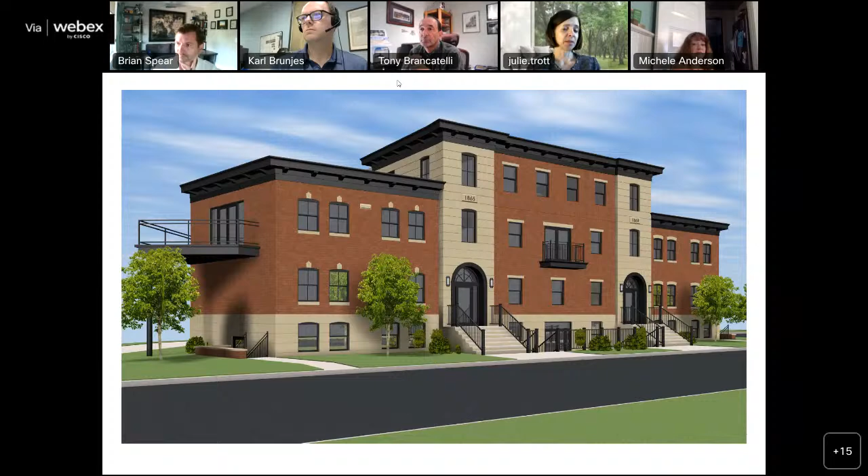All right, like we said, we're very excited about this project. We like the direction you're going, and we look forward to you coming back with the final details so that we can get you your final approval. Thank you. Thank you. All right. Thank you.

We'll move on to our final applicant located at 2429 West Superior Viaduct, the Bridgeworks project, revised plan of new construction of mixed use building.

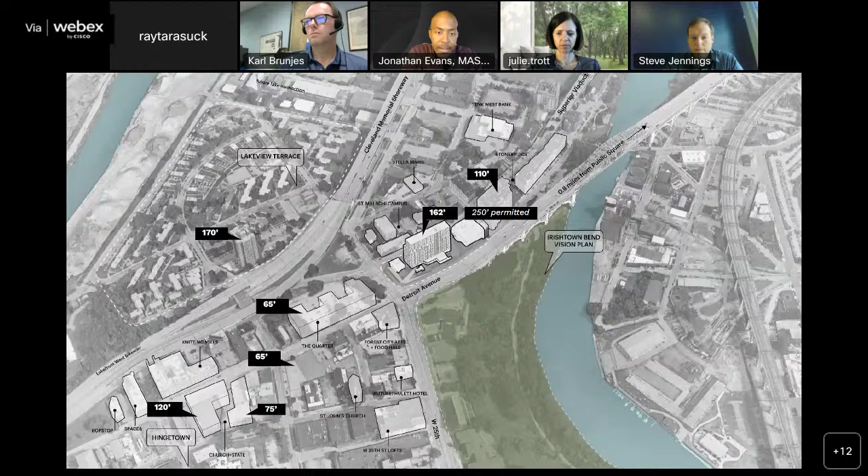So again, this is the product that we're presenting. I know we've gone through a couple of iterations, but we're very pleased with how the product has come to be and been consolidated to this singular window wall tower form. We have significant ground level public realm amenities, residential program, a restaurant at the 11th floor with a deck, and then a hotel above that. There's been previous iterations of this, and we're really pleased with the patterning now we have with this window wall system. We'll talk more about the details in future slides. Next slide.

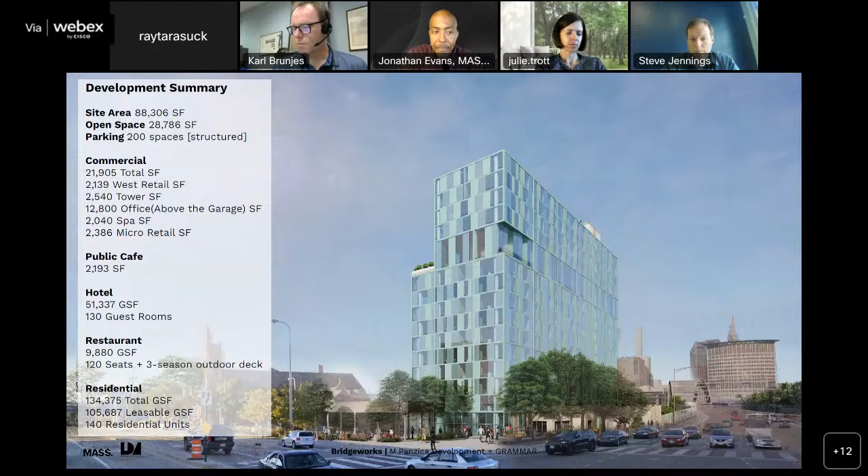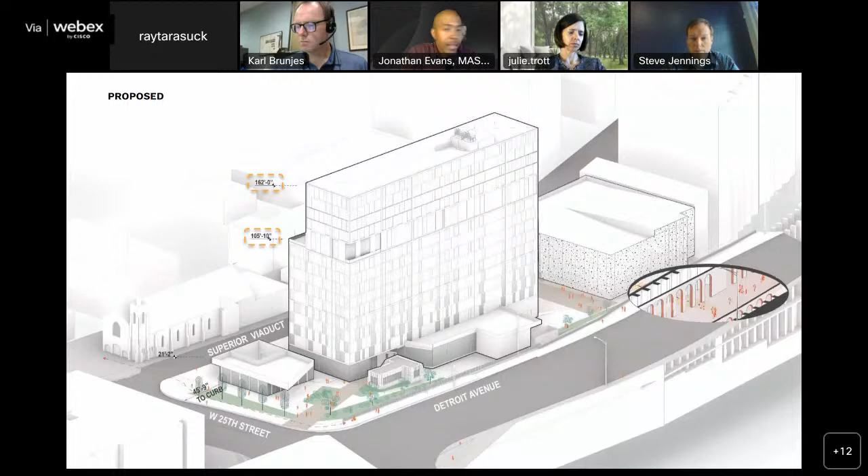The next slide is a similar representation rendered from the other side here. From this side along the viaduct, you see the access to the hotel porte cochere for the drop off to the hotel. You can also see, in that sort of tannish color between the tower and the garage, it's part of that public realm amenity program that is directly accessible to the streetcar level of the bridge. Next slide.

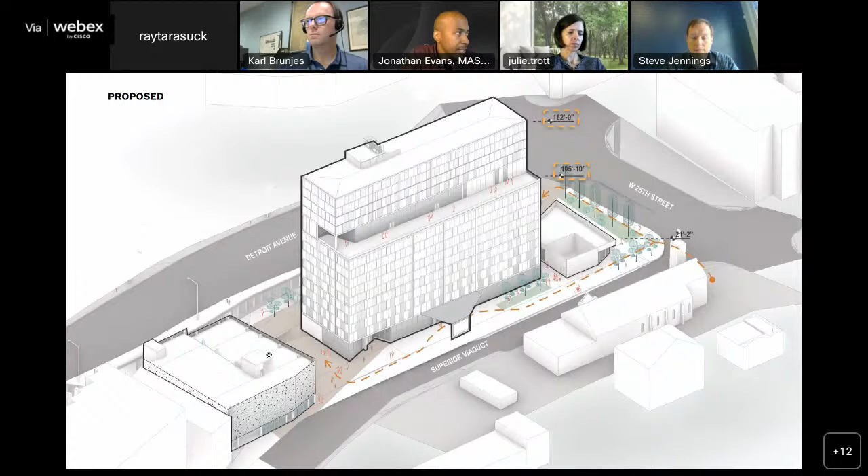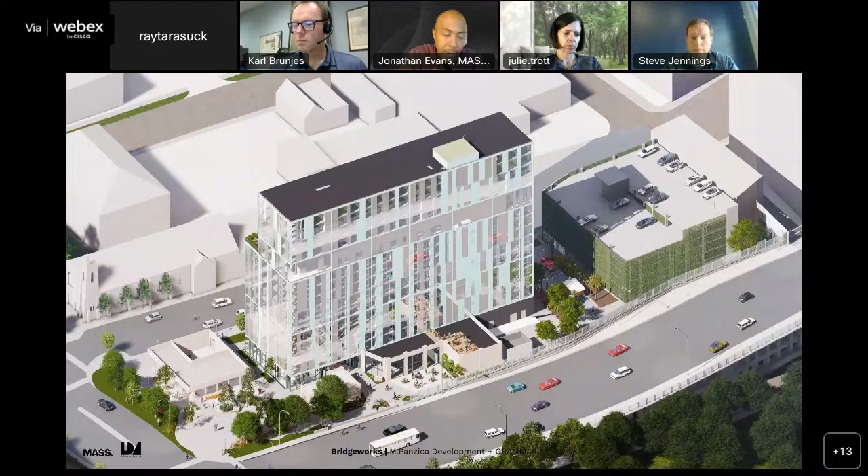These next couple images look at the same massing, but start to actually render the materiality we're considering here. We're excited by the idea of using a window wall system. The lightness of it is really exciting, and the patterning of the vision glass, spandrel, and metal panels can work together to create a nice tapestry along the four sides.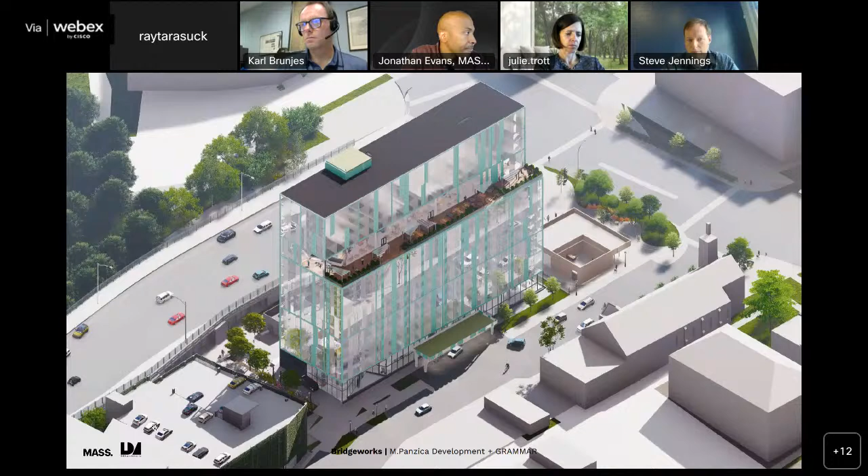We could probably breeze through the plans quickly, but in terms of where we are exactly, this site is unique in that it doesn't really have a back, so we're being mindful of how people move to and through the site to the public realm amenities throughout, while acknowledging and creating clear access for a back-of-house, without that being part of the public experience. There's really generous open space, and we've taken a lot of effort to be inviting from each approach to the site and preserve visual access to the church off of Viaduct, just to our site's north.

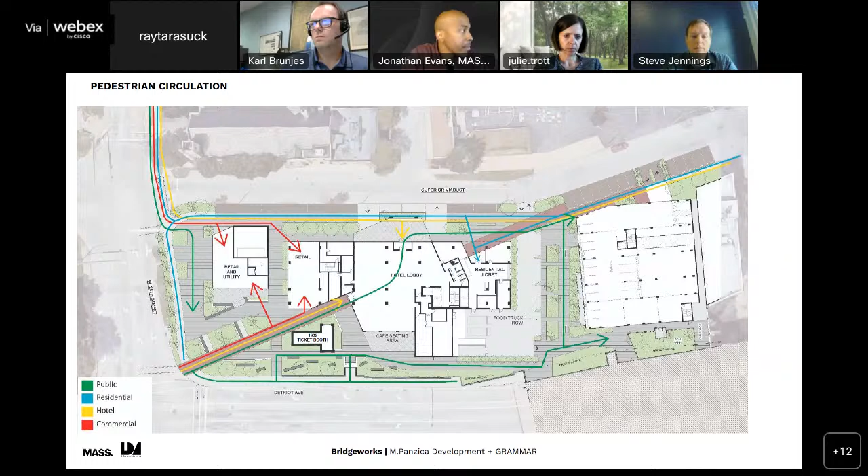We can breeze through these. This is just looking at different modes, vehicular versus pedestrian, loading, as I mentioned.

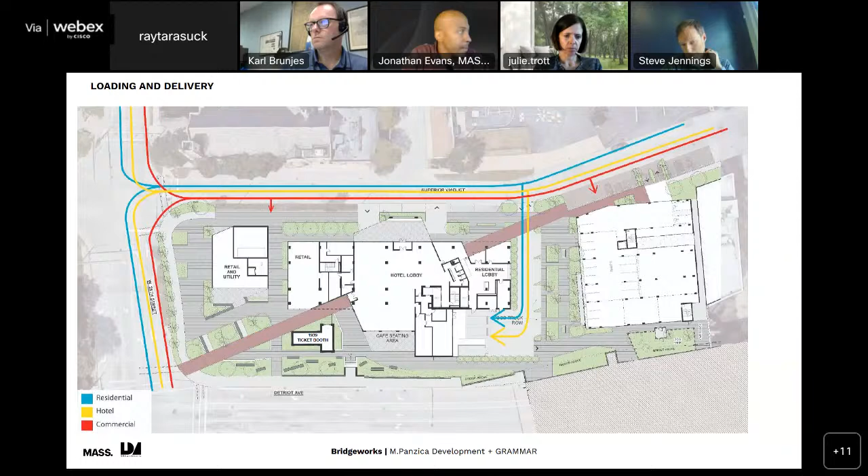Zooming in a little more specifically, this starts to give a sense of the character we're trying to create in terms of public activity at this zone between our tower and the garage, and then providing the connection to the streetcar level.

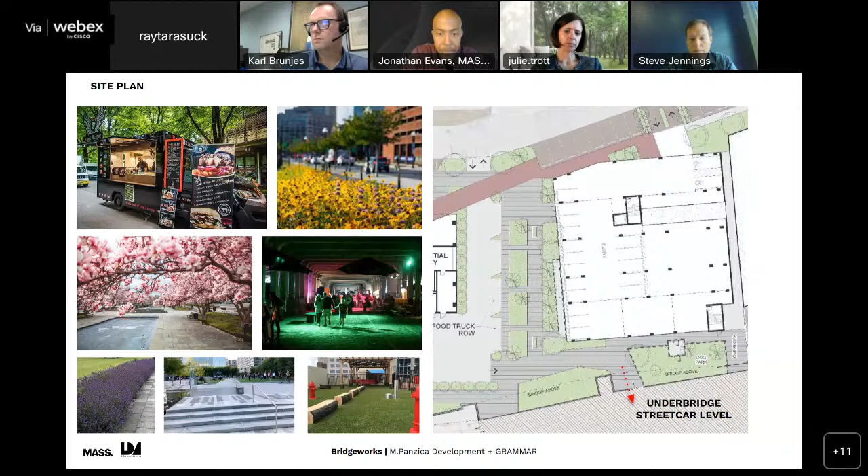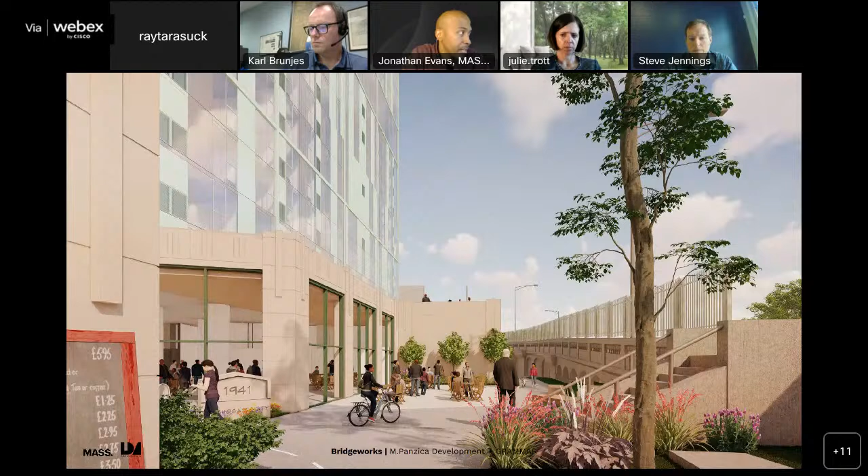We can breeze through the next couple of slides. This really just sets the table and acknowledges how we're trying to understand and leverage the history of the site and plug into that in a meaningful way.

This view here is from our site looking out, you can see along the right that's the bridge as it comes across the site. In our foreground, right behind the menu you see there, is the existing original ticket booth building to be restored. Immediately in the center of the image is new construction as part of the base of the tower.

We're using a cast stone product so we can more deliberately and explicitly reference the color coursing of the stone we're trying to replicate with the ticket booth building. That cast stone piece grounds the overall glass tower coming down.

What you see there is a public cafe space as part of the hotel programming. We're also really excited about being able to walk through the space, so you can imagine going from the corner of 25th and Detroit through the site to the under-bridge.

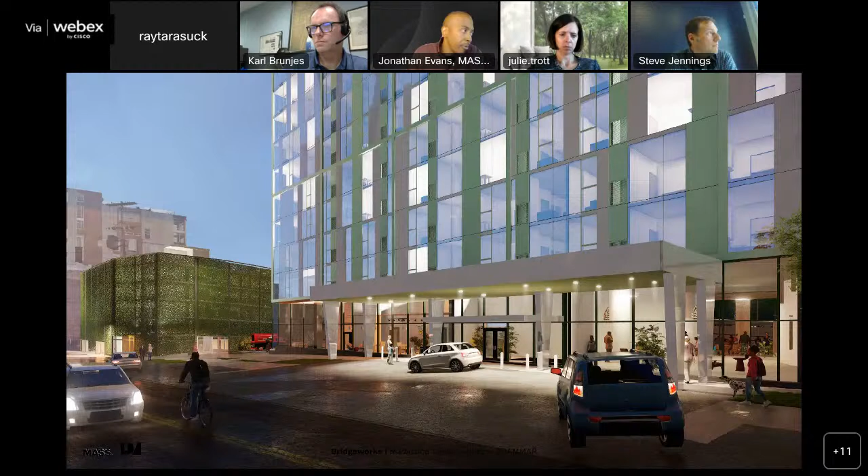From the reverse angle, this would be the approach coming in off of Superior, the viaduct, with the hotel porte cochere. That canopy is a metal panel product of similar finish and color as the tower above.

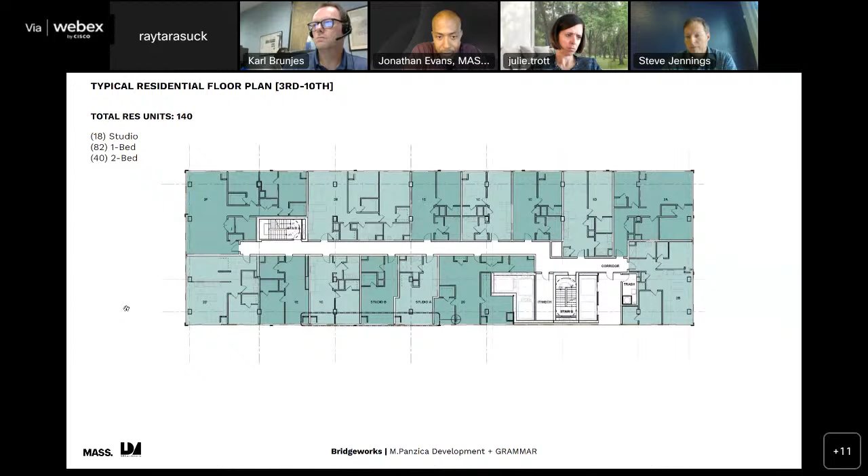We can breeze through these, just getting a sense of the modularity of the building: the residential building moving up to this level where we have the restaurant with the large deck, and then the hotel above.

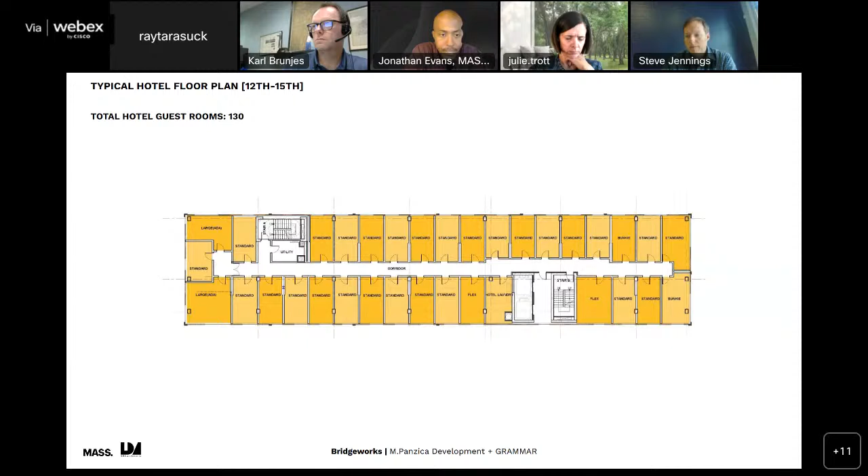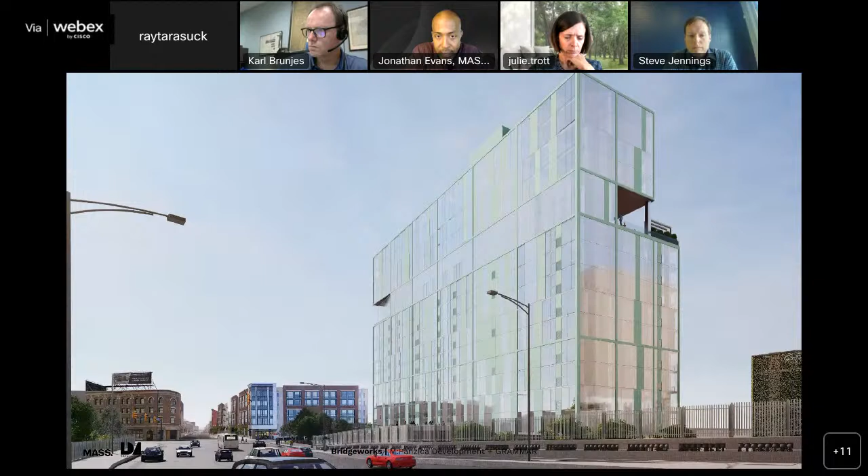And again, I think we're really excited to make something that is impactful, dare I say iconic here. We like the approach off of the bridge, the sheerness of this facade, subtle carvings to acknowledge some of the key moments of the building, in particular the deck on the 11th floor.

Again, setting up this overarching regulating framework within this window wall system, and then within that frame, the regularity having moments for play with the way the pattern repeats, the way it oscillates with the metal wall panel and division in the spandrel glass.

Next slide, same thing at night. I think what's also interesting is how the vision, spandrel, and metal panel will create a subtly different look and presence for the building depending on the time of day.

Next slide, this is coming around from 25th Street. We like how we're trying to break up the massing, and from this approach the building steps down in some ways, evoking the form of the church. So the idea is that depending on the approach, it has a different sensibility to it.

Next slide, this is from the opposite corner. Again, as we push the building back off the side, allowing for a welcoming presence. I think we have some detailed pictures of materiality coming up here, which hopefully show the interaction between the Parisian patina metal panel and the stone, working really well together.

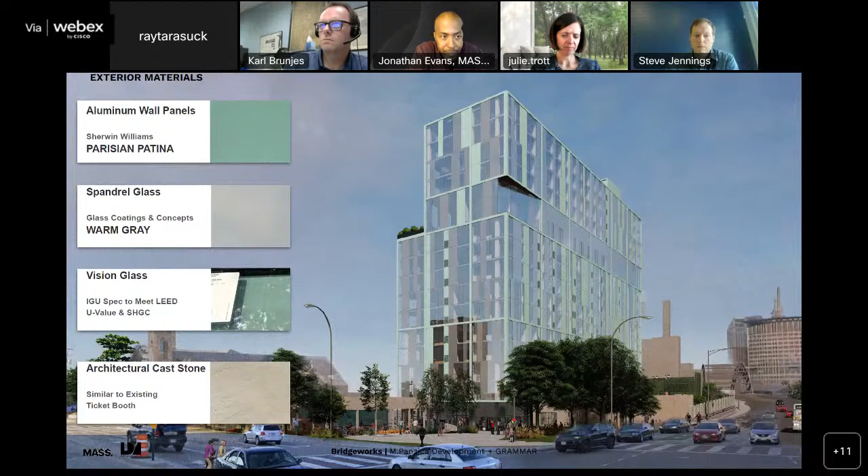Another night rendering there. Thanks for speeding me up here. So, aluminum wall panels, Parisian patina, spandrel glass, vision glass, and then the architectural cast stone that is intended to match the ticket booth building.

The next slide shows those same materials on site next to the ticket booth building. Again, really trying to find a palette that works well together, that is contemporary of its time but still lets the historic feature of the site shine through. And one more slide, you can see the warm gray spandrel panel, the metal panel, and the vision glass next to the stone. I believe that is it.

All right, well, thank you for the presentation. We'll begin with feedback from the local design review committee.

Madam Chair, Nate had to leave, but he left his comments in the chat. He says the Ohio City Historic Design Review Committee recommended approval of the last item on today's agenda for Bridgeworks, with the understanding that the parking garage and any signage would come back to local review.

Thank you. Then we will open the floor to the commission for questions and comments. Who'd like to start us off?

Mr. Strickland: Thank you, Madam Chair. I had toured the existing county facility a couple of times, and the prospect of exchanging that facility for this incredible structure is a very positive exchange. I've always been thrilled with the design, the considerations of the setback so you don't obscure the church. I think this building is a perfect transition from the high rises downtown on the east side of the bridge, coming west into Ohio City. I'm very much looking forward to this project moving forward. Thank you.

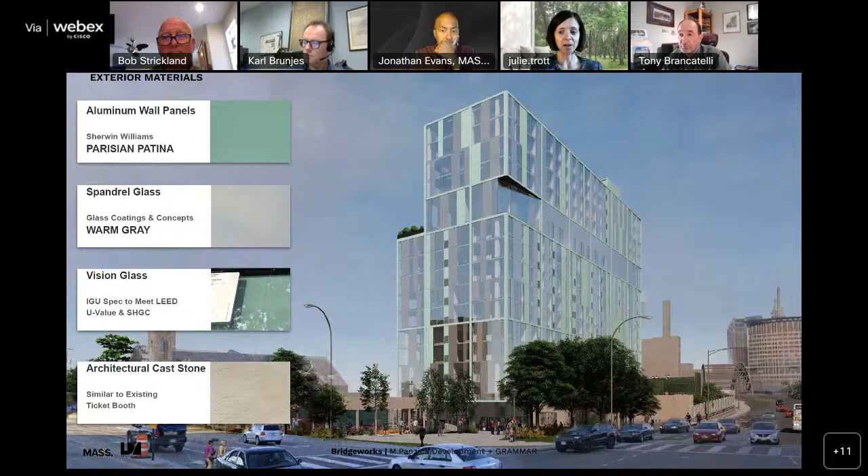I'll state mine now while we wait for others to comment who may want to. As I've said in the past, I do really admire the design. I think it's a very handsome design and very well articulated. And I do like your final detailing of the materiality. But I personally am not in support of this structure on this site due to the height. But I do appreciate and do like the direction you've taken the design.

Ms. Anderson: Thank you, Madam Chair. I do appreciate the lightness of the design. I really do like to see that it's a little brighter, not the gray that we often see in these presentations. So I really appreciate that, and I appreciate some of the choices here. I'm inclined to agree with the chair in that I think the overall height is not appropriate for the site. But there are a lot of aspects of the design I do like. That's basically it. Thank you.

Thank you, Ms. Anderson. Feedback from other commission members?

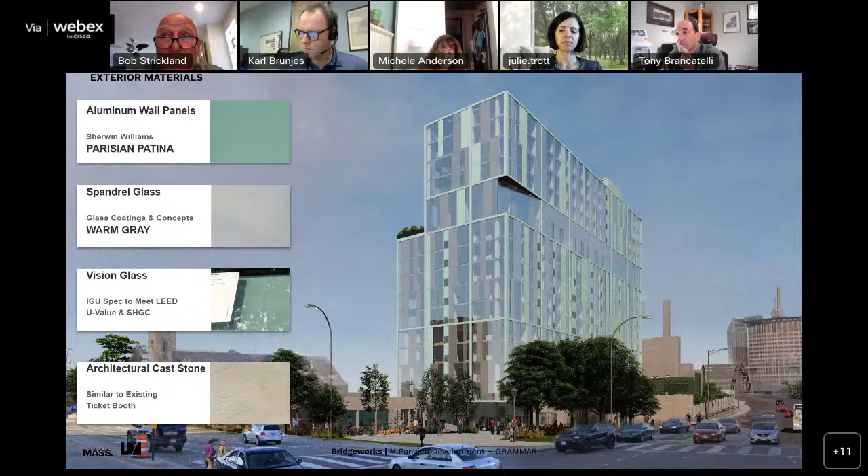All right, would someone like to put forward a motion? Mr. Strickland? Thank you, Madam Chair. I move to approve the project as presented with the garage and signage coming back for final approval.

Along with landscaping? Yes, excuse me, and landscaping. Were there any other conditions from the design review? Those are the three I heard. Karl, did we capture them all? Yeah, I think they had also mentioned that it's going to be 100% salvage from the existing building. Is that correct? That is correct. So I would include landscaping and salvage of existing materials as a condition.

Okay. Do we have a second? I would second, Madam Chair. Tony. Thank you. We have a motion. We have a second. Any further discussion?

All right, Mr. Brunjes, please call roll and announce the results. Ms. Anderson, No. Mr. Brancatelli, Yes. Mr. Colicchia, looks like he left. Mr. Dryer, Yes. Mr. Edmund left. Mr. Strickland, Yes. Mr. Tarasuck recused himself, and Ms. Trott, No. Madam Chair, the motion to approve passes 3-2 with one recusal.